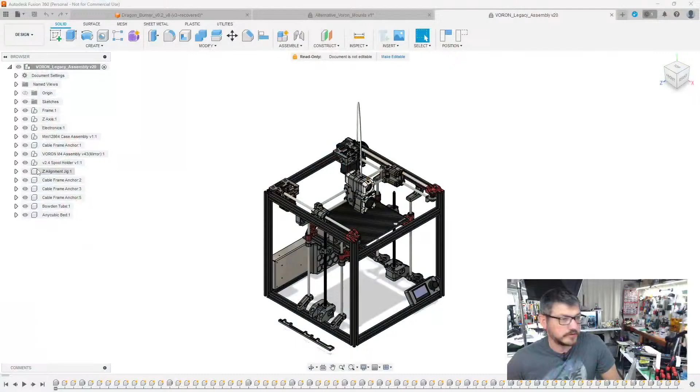And then I'm going to reuse the clamps for the belts because those already have the heat inserts in them already too. So here we go - so mine's also modified because I'm using an Anycubic bed, so any of the red parts in this have been modified.

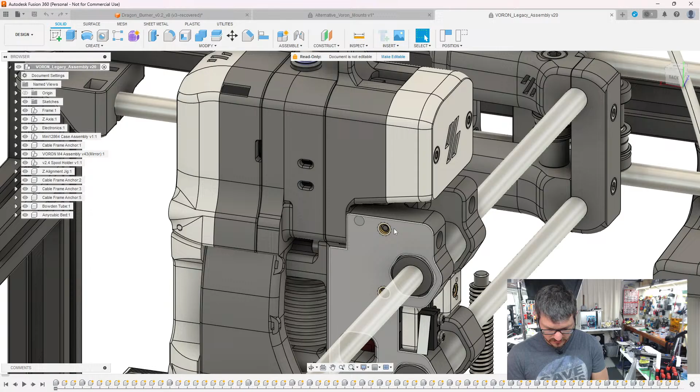They go in that side - so there they are right there. So if I put these together like this, they go - is that how that goes? Like that? Yeah, the two clamps go on the outsides. Ah, like that, there we go. And then if this is looking at me like this, they are on this side, which, yes, that matches up.

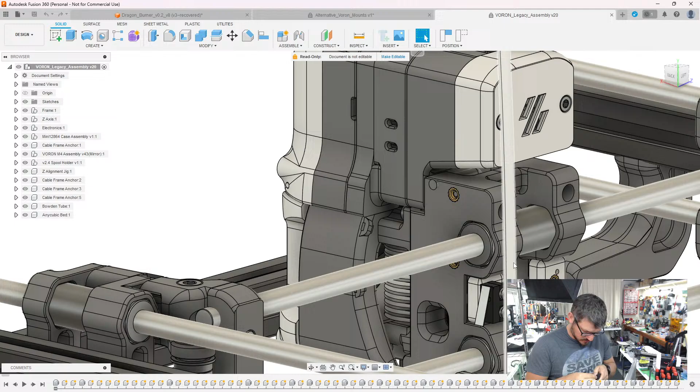Okay, great, so we'll need a couple more heat inserts. I'll turn it back on. After these 3, that should be all the heat inserts done, and we can start disassembling the printer, the hot end at least.

So we'll take this from a Bowden printer to a direct drive, which is great because direct drive is so much more superior than Bowden. Yes, the argument is made for Bowden being faster because of the lighter hot end, but with such a small motor, it ain't too bad.

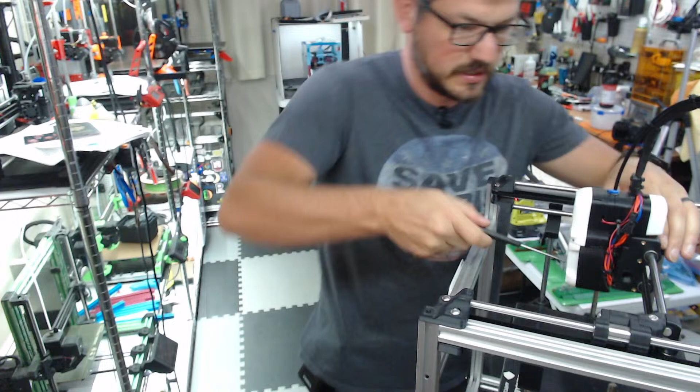It's 2, and then I need 1 more. I don't know where I got these ones that I have, but they've got a tapered end to them, which is really nice, so you can sit them in the hole and put them in. There are some other ones I have that are just knurled on both sides with no tapered end, so they're kind of hard to really sit in there properly. Okay, we're just going to tilt down a little bit, and you can see, got it all right here. We'll try to do this without making too much of a horrible mess, because I have a feeling this is going to make a mess of things.

Come on. So we take that off first. We can take off these.

Come on. Yeah, I don't like that part there. So let me get the snips.

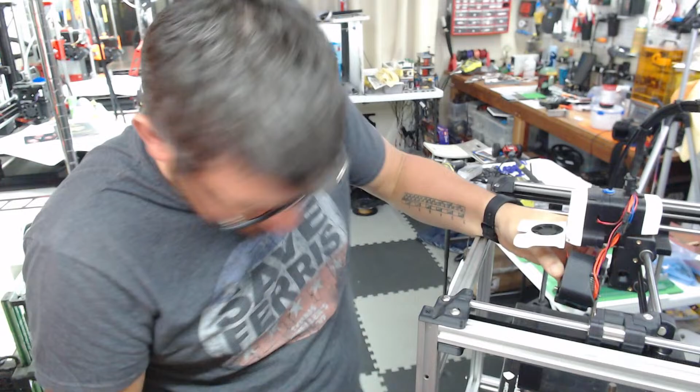Oh, I forgot I did leave some filament in this. I totally meant to take that out, and I totally forgot. So that's okay, we're gonna just put a bunch of it through so I can take it out later. There we go.

I also forgot, I don't like the way that this hot end fan kind of goes through there.

I'm gonna get this hinge out without breaking the part, because there's a piece of filament that goes through it, so I'm unsure how that's gonna work.

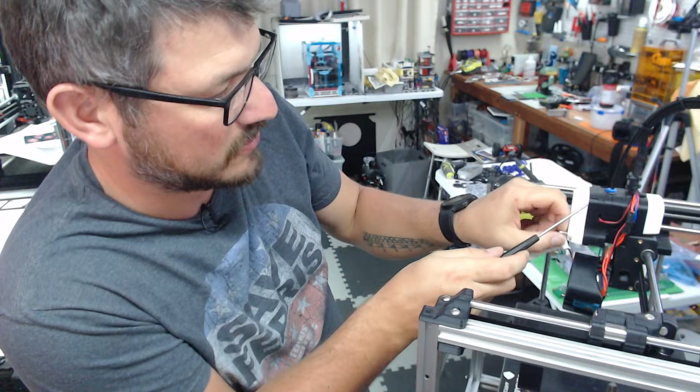But I won't be reusing, I think, any of these fan parts, which also sucks. I hate the blower on this, it's unique, I think it's a 40-20. It looks cool, it gives a very much of a Cyclops look to the hot end, but it literally does nothing but be in the way, honestly.

Push everything out. Come on, there we go. Piece of blue ABS in there.

Okay, so now let's snip off the— oh, that flew. So one thing I did forget to do, though, is I forgot to print the cable strain relief for both printers. I need to print it for both the V0 and for this one, so that will be something I do at some other point.

I really need to get my— doing this by hand is for the birds. hex bit set. Son of a gun. M2.5, here we go.

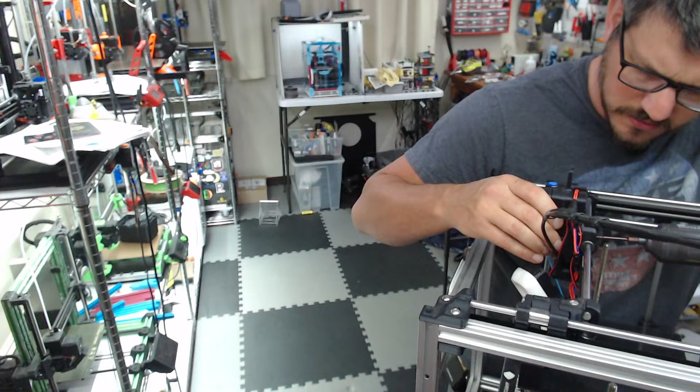Like 60mm screws, they're like 45s, but it's long. Oh, there we go, that's how that takes off. And then now that comes off. There we go. Oh, wait.

I think I already... okay, I guess I'm not doing Klicky. Shoot. I totally forgot about that.

I printed the parts that... I don't think these have the Klicky mount. Or no, they do, I can still do it. Okay, it still fits in there, that still works. Okay. Yeah, all right, we're still okay. Whew.

Should still be okay, definitely worry about that for a hot second. Don't know where those went. Black screw on a dark and light gray floor—that's not helpful at all. It's this little guy here.

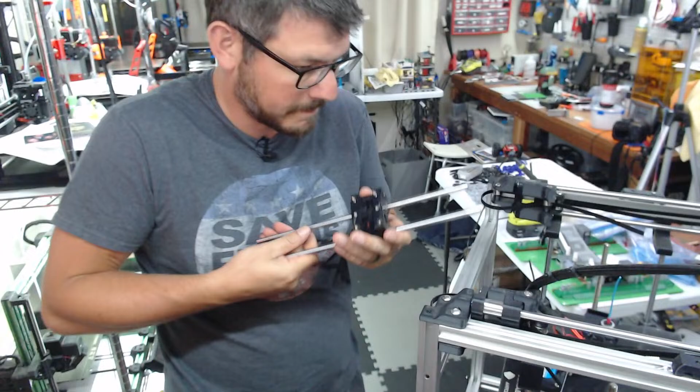Oh, man. Take the rest of these out. I think these just fall out through. That's good, yep, and yep. So these go with those for the belts.

Now we take apart the main carriage. This is using those LM8LUU bearings—the long 8mm bearings.

At least didn't need any other ones in there, did they? They don't. So now I'm not really sure—I'm gonna have to break these because I hammered these things on. There's no way they're coming off without a fight.

And how I'm gonna do that is a mystery in its own. Yeah. So we got to figure out how to take this apart. So let's try a screwdriver first, which my screwdriver's not here. What did I use that for? Or did my wife use that for something? Did I use that for something?

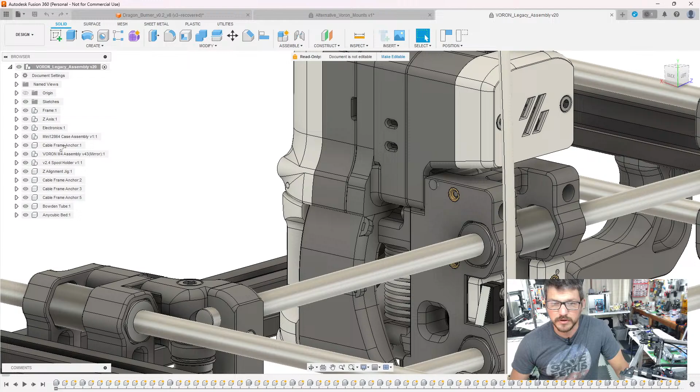This here, the Legacy is different. I also think I might have the parts here somewhere for it. Yeah, Klicky probe, here it is. Open up. Does it show it anywhere here? So if we go to Voron Legacy.

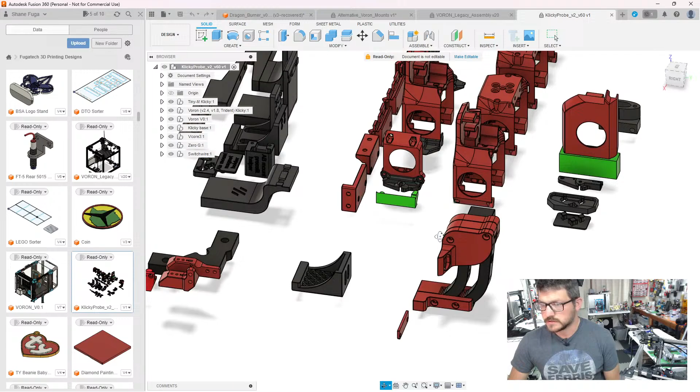Here we go, it's showing up now. Here we go. So that piece is this guy right here. Yeah, that's exactly what it is. And can we see it in here?

See it here anywhere. But anyway, that's the piece. I might just need to file it down a little bit, which is fine. That'll take a second. Where'd I put it? There it is. Let's just see if we can take a smidge off.

I totally forgot about the Klicky probe, because I have another Klicky carriage for it as well.